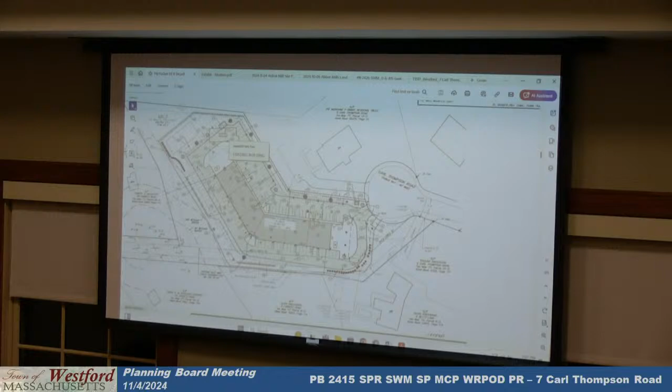Lastly, they talked about some TDM measures, which are issues the planning boards try to incorporate into site plans - business parks, I think it's less with industrial parks and more with office parks - ride sharing, all the traffic demand measures that can help reduce traffic demands around the area. While we agree there's not really an effective use with an industrial building, we did highlight that it is multi-use, with a variety of companies that would be in here. Inherently, we believe there would be staggered work hours, reducing peak demand so you're not having a wave of traffic at 8 o'clock where everyone has to be at work at the exact same time. So we just highlighted that.

Lastly, I'll go through a couple overall offset distances. I know there were some concerns and comments about distances, and they don't show up very well - I apologize, it looks so much better on my monitor than when I printed this. But going on - Joe, if you zoom out a little - well actually that's not a bad place to start. That's the closest building, off of 6 Betty Lane, and it's kind of faded.

We do have the aerial image in the background. Our development is off to the left with the gray pavement. You can see Carl Thompson in the upper middle, and Betty Lane is way off to the upper right. Our offset distances are roughly 160 feet to 6 Betty Lane from our building.

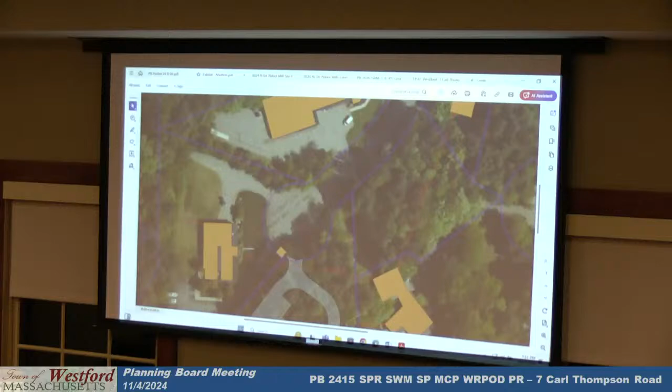And yeah, there we go. Thank you, Joe. And you can see Betty Lane. You have the same problem with PDFs that I do, it doesn't like to zoom all the time.

So that's Betty Lane, Oak Hill Road is off to the right. Our project, or Carl Thompson, is to the west. The building to the left is the old Alpaco building, I'm not sure of the address, I think it's number 2 Carl Thompson. Then there are buildings to the north, 497, 499 Groton Road, and that one's about 100 feet from the house on Betty Lane.

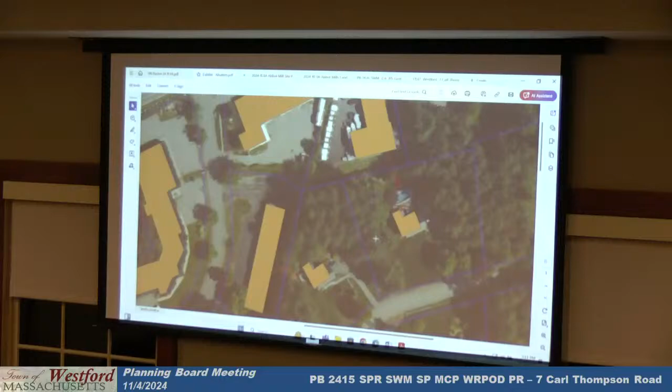Just for reference, I think our closest abutter is 160 feet, and well, not ideal. It ranges anyway from 50 feet to about 400 feet on average out here for some of the setbacks.

And then lastly, I know we're in a WRPOD, and the percent impervious. We just did some quick calculations for the other properties on Carl Thompson Road, where we propose 42% impervious for our project. Number 2 Carl Thompson is 54%. Number 5 is 31%. 45 Groton Road is 66%.

And 497 Groton Road is 53%. So the average for the 6 buildings that I checked around our immediate area was about 53%, and we were under that at 42%. I just thought that was an important reminder that we are consistent with the neighborhood and on the less impervious side. I think we've answered all the questions and brought the board up to speed.

Walter would be happy to answer any questions, and myself included. Great, thank you, I'll let you go first, Bob. Do we want to ask town if they had anything? Do we have anything from Joe? Why don't we go through, and then if we can answer any questions.

First question I had was more to Joe than to Matt, but it occurred to me that Carl Thompson is a public way. Do we know when that was accepted by the town? I don't offhand, but we could try to find that information.

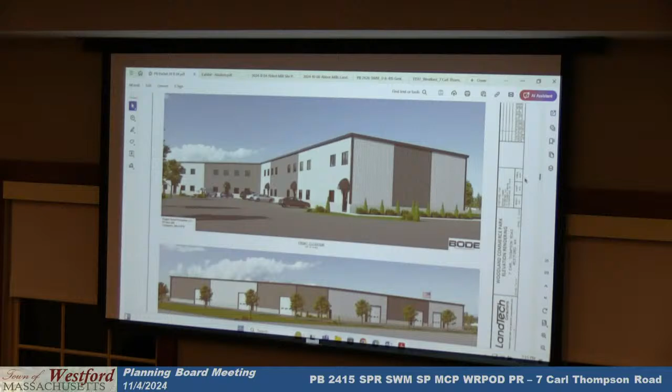No, and I think what's on the screen is the updated version. Yes, because you can see the reduced garage doors, the number of doors was reduced. Yeah, we only have 6 in the back. We submitted that with Matt's answers to the questions. And the same on the front elevation, you can see the entryways are reduced. Okay, so the date's wrong then.

Could be, yeah, that would be LandTech. Anyway, not a client error. There's a revision date up here. All right, good.

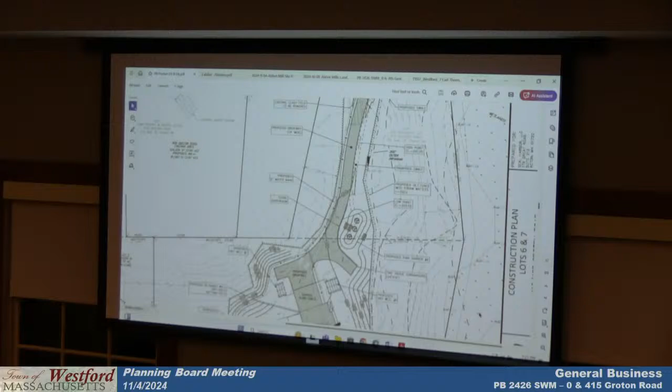Our goal tonight, and I'll go through the stormwater management permit, but we're just developing 2 lots - this Lot 6, which is the close-up that Joe's showing, our Hammerhead lot off of Groton Road. And then off to the left, there's Lot 7, which has frontage on Groton Road via 409 Groton Road.

But we're going to be gaining our access off of the access road that cuts from Groton Road over to Lakeside Meadows, Muriel Drive, Lawson Road neighborhoods. It's a buildable lot. The ANR has been endorsed and signed off, and we'll get into that when we get into Lot 7 in a second.

Lot 6 is 4.44 acres. It does have the existing red house that was built, I think Joe said 1950. Lot 7 is currently a vacant lot, 2.76 acres, and that has the frontage on Groton Road. Where we're developing, they're both Residential A zoning districts.

Lot 6, for lack of a better word, is a redevelopment. We're tearing down and demolishing the existing house, and building a new 5-bedroom. I think we've been working to develop with Board of Health, and that may be a 6-bedroom or even a 7-bedroom, but the layout and grading is exactly the same if that septic does get a little bit longer. We've been working with Conservation Commission.

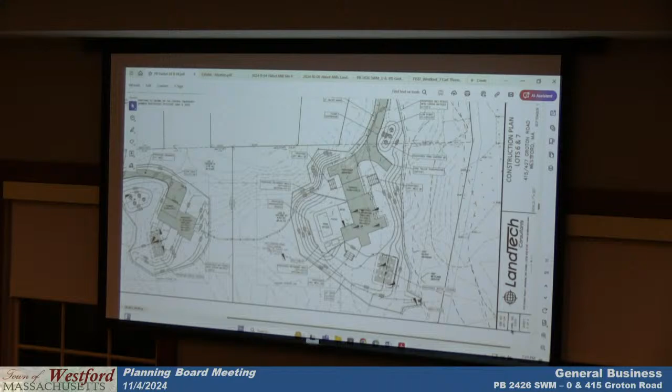All of that, trying to minimize the limits of clearing and all the things we do when planning to build this. So there was a lot of thought that went in. Before we got to this board with stormwater management, we focused on conservation, where there was so much resource area on lot 6. Lot 7, moving off to the west, similarly has no resource areas, but we focused on stormwater management with rain gardens and an infiltration trench along the driveway, maintaining the peak rate of runoff for both properties in all directions toward the abutters.

Both lots have utilities of electric and water being extended, with on-site septic systems. There are no wells, but there is town water, so they'll be connecting to town water. We'd be happy to answer any questions.

Relatively straightforward. Engineering did issue a letter. All of their comments were conditions of approval and recommended conditions. There were no other comments, so we have no issues with their letter. Do you agree with all the recommendations? Yes, absolutely.

First, compliments on the detailed operations and maintenance plan. Because it is so detailed, I think it's important to the appropriate stormwater management of this parcel. My suggestion is that part of the conditions be that it be recorded as a covenant to the deed, to ensure it goes with the property from homeowner to homeowner. These things have a tendency to get lost if it's just a casual document.

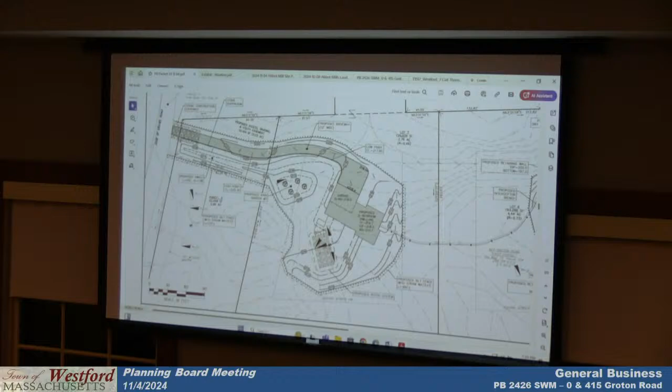My only question is on Lot 7, just kind of the access. So it looks like you have an easement going through Parcel A, and then it goes out into the gravel road. Is that kind of paved, and is it maintained by the town, or is the owner going to be responsible for that? It's a private way. So one of our to-dos before it gets too cold is to drop some gravel and maybe some cold patch, or if it's warm enough, something else in there to better the road. We've met with the town several times about the road, not to try to get any work done by them, but we are more than willing to do some work to bring it up before the winter months come. Okay, great.

All right, this isn't a public hearing, but does everybody have any comments?

So then, can I get a motion to approve PB 2426, 0 and 415 Groton Road Stormwater Management Permit? So moved. Second. All those in favor say aye? Aye.

Great, thank you. Thank you very much. Good luck. Thank you. All right, moving on to PB 2410, 427, 429, 431, 433, and 435 Groton Road. Request to review and approve changes to 427 Groton Road as approved by a minor modification.

Okay, good evening, Mr. Chair. For the record, Matt Waterman with LandTech Consultants. Here with me tonight, Seal Harbor team, Mark. And the attorney is still with us, John Silverstein, directly behind me, I couldn't see him, sorry.

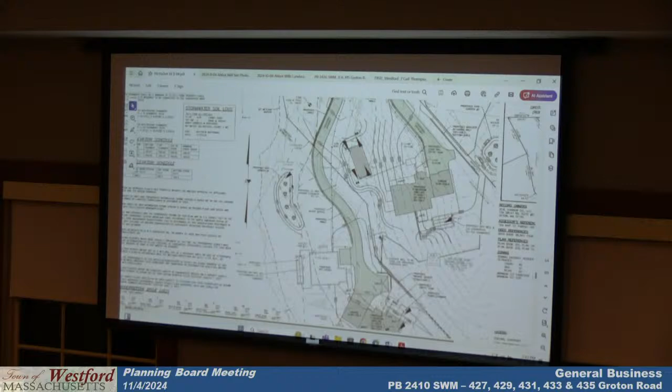There's a significant restoration plan in the buffer zone that's tied into the conservation permits. The big change from a stormwater management permit was resizing the roof drains specific to each of these detached dwellings. So that's really the only change. Obviously, the house was put further outside the resource area, the 200-foot riverfront buffer. We had to redesign a septic system, so there was some additional clearing to get a septic system that would fit with this layout. But otherwise, everything from a stormwater management point, north of 427 Groton Road, hasn't changed.

Let me ask Joe, I don't see anything from engineering in our packet. Have they chimed in on this? They have, as of this morning or early this afternoon, did not have any issues with the changes that are proposed. Since this is an ANR lot, really our consideration here is stormwater management. So they did review, they did not have any concerns. So I guess what we're requesting is the board would approve it as a minor change. I should have mentioned that, sorry.

Bob, do you have any questions, thoughts, comments? Following up on my similar line of questioning for the previous lots, you have two T turnarounds on 427. One appears like it could serve as a driveway for the art studio or accessory dwelling unit. The other one appears to be a required T turnaround for the fire trucks? No, only on lot 6, that was their only concern. This is more of a standard residential turnaround. It is exaggerated a little bit, enlarged since it's kind of pigeonholed in there, and I felt turning was important, so we enlarged it above what we would normally do. But we didn't take it to the level of doing turning movements for a full-size fire truck. That was my only question, since it wasn't labeled as a fire turnaround. Not on this lot. Okay, I'm good.

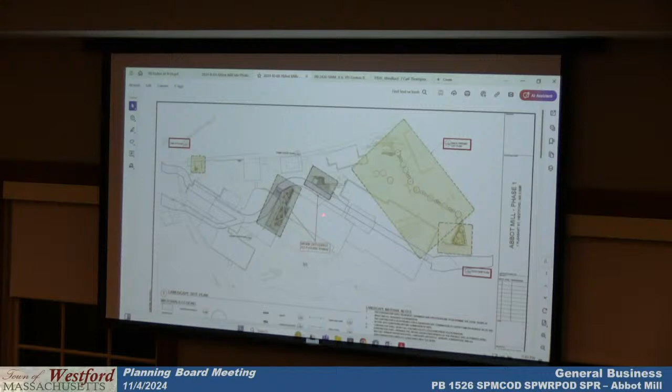This area is used as a dog exercise area today, and they want to make it better for dogs by essentially fencing it in and adding more landscaping. There are 2 future pictures which we are not looking to do right now, so it's on the plans. We're not trying to hide it since it's out there for you, but we're also not trying to do it this fall, so that'll come at a later date.

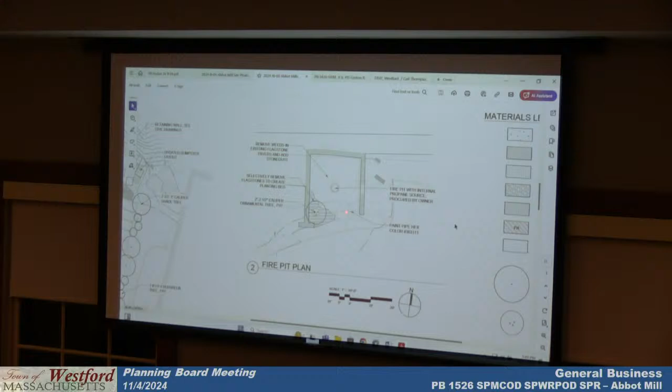All right, so this is the fire pit plan. It's a little hard to see here, but essentially all they're doing in this area, the simple one close to the entrance, is adding a fire pit with an internal propane source so you don't have to dig up the nice flagstone area. They didn't want to dig it up and remove some of the historical character. There's some above ground equipment that they also want to maintain, so to keep the natural characteristics and preserve the character, they're adding above ground planter boxes.

That old pipe is not used? It's not in service, yes. It's not gas. We were concerned about it — we were like, this would be perfect for a fire pit, and then for a second we thought, wait, is that a gas pipe? But it's not. Can you scroll down on the page a little bit?

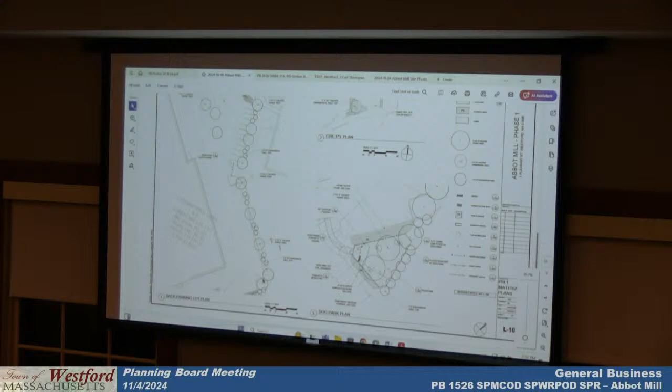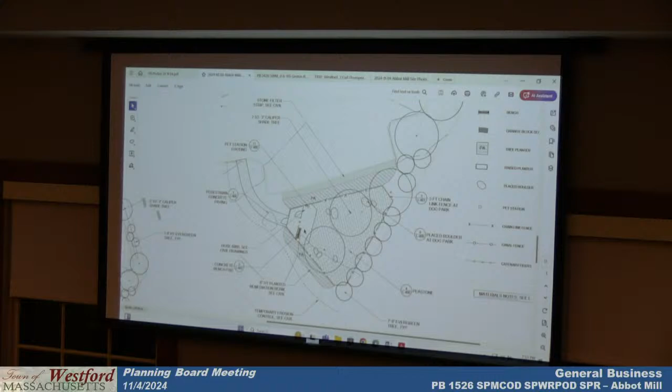Going back to the plan — in this area we plan to fence it in, and we're adding a filter strip to capture some of the runoff and mitigate stormwater coming from the parking area. We're showing concrete here because that was our original thought process, since it's more plowable. But we had toyed with the idea of switching it to stone dust to appease Concom, and once we saw the old permits, it requires us to keep this area permeable. This used to be impermeable — it used to be completely paved. In 2015 they ripped up the pavement, and one of the permit conditions was that we couldn't repave it or add any impervious area.

So the only change to this that you see here is that the concrete paving will just be a stone dust walkway instead. For stormwater measures, again, it's all pervious. We're using a fine pea stone.

Since Stony Brook is right next to this area, we are adding a slight berm, a 6-inch berm in this area that we're gonna have tall grasses on, so that way if there's any dog waste it'll be contained. When I was at the site, I've never seen dog waste around, so it seems like the residents are very good about picking it up. I was specifically spending time in this area where they have the dogs today, but just in case there's anything, it should be trapped within this area for maintenance to deal with.

And we did speak with Concom. We went to their last hearing, and they determined that they don't have any jurisdictional control over the area. We're exempt from the local regulations because it's gardening. And the state regulations, we're above the floodplain, all the mapped floodplain elevations. Historical mills are also exempt from riverfront regulations by the state. So we are all set with Concom too.